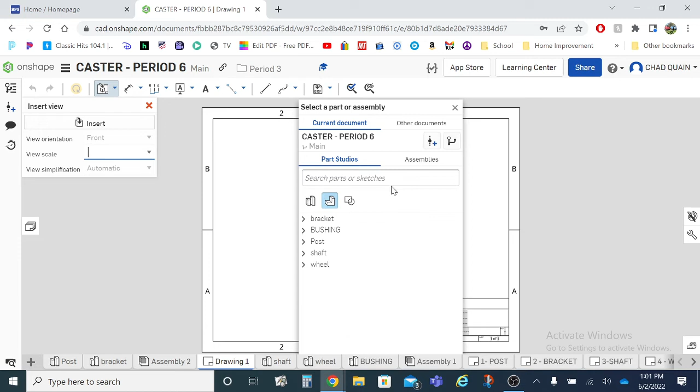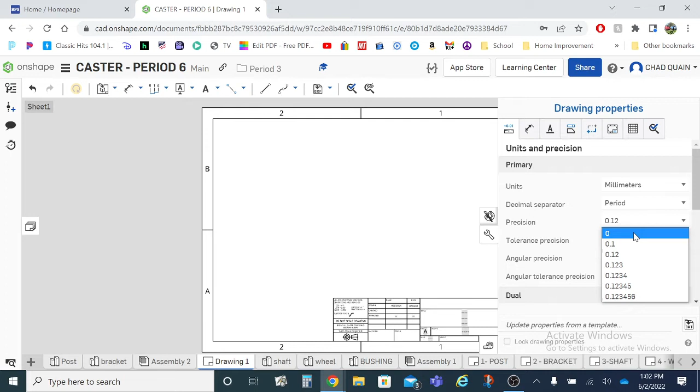So it's going to ask me, what part do you want to insert? I don't care about that right now. I don't even care that this part's open here. What I care about is this little wrench. I'm going to click on the wrench. I'm going to change my units to millimeters. I'm going to change my precision if I need to. I think most of my dimensions are with no decimal place, so I'm going to put it at 0. I'm going to click the wrench again. It's going to close it down.

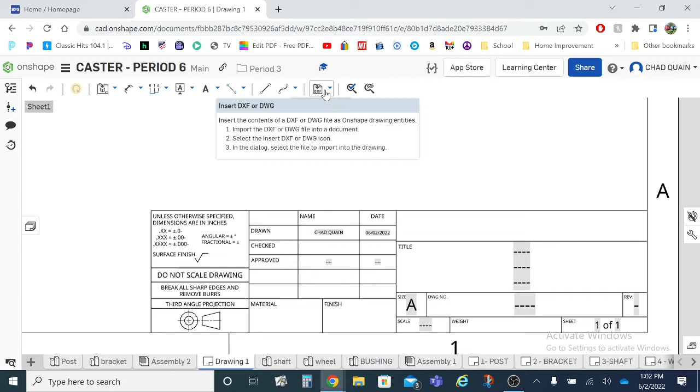What I want to do is show you how to go about modifying your title block so that everything looks correct. One of the things you have to do in this drawing is add in your HutchTech image. So I'm going to click on Insert Image. Your HutchTech image should show up immediately. If it doesn't, it means that you never imported it into the actual drawing. I can show you how to do that if you need it.

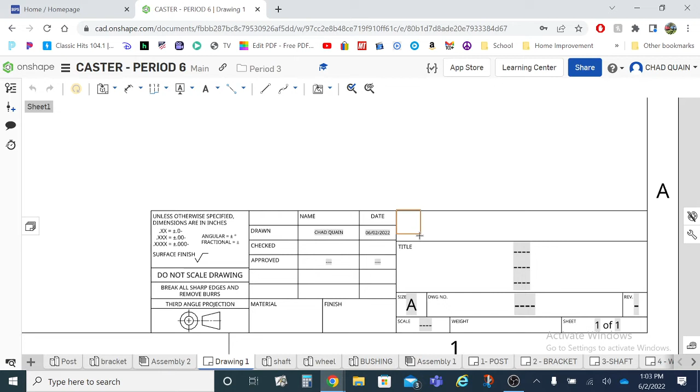So the next thing it's going to do is ask you to pick a place to place it. I'm just going to simply arbitrarily pick somewhere. There's my part. Hey, guess what? It's a little too big, so I can grab on the corner of it. Now it's a little too small. I can left click hold, and I can kind of adjust it. If you zoom in on it a little bit, you have a little bit better control of it. Just be careful because sometimes the snap points will kind of mess with you a little bit.

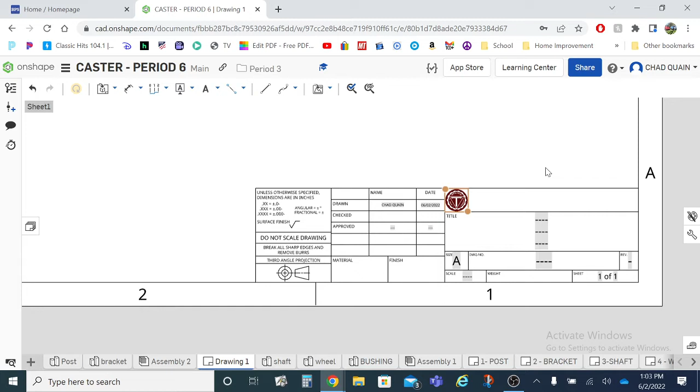That's nice looking. So I'm going to select on the part. I'm going to do a Control C and a Control V. Weirdly enough, Onshape does not have the ability to right click and copy, but it has the ability to right click and paste. Why? I don't know. Weird anomaly. So I'm just going to take and place my other logo right here.

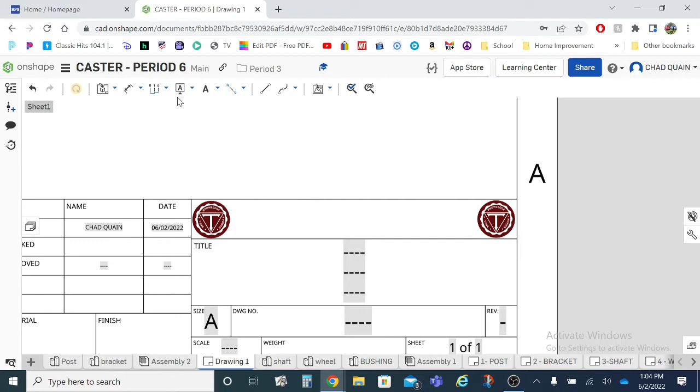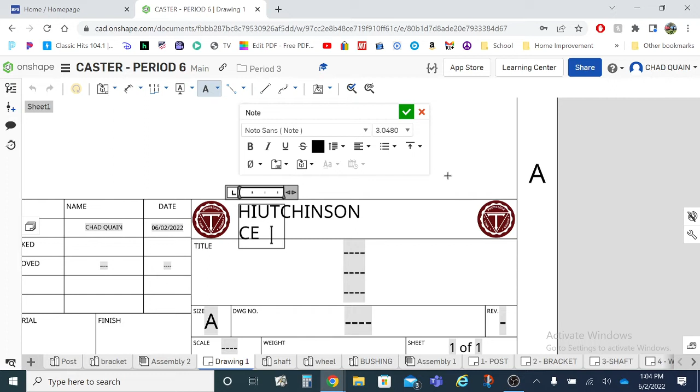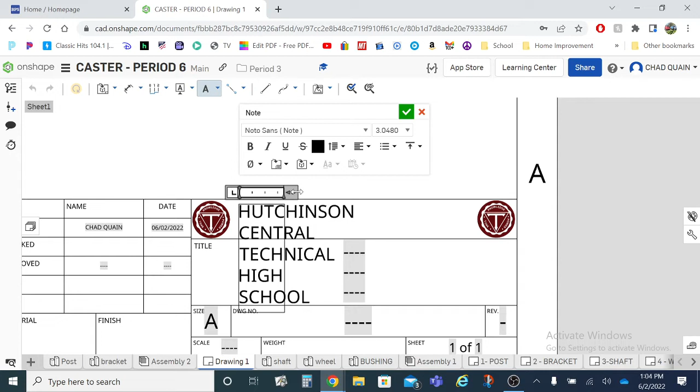Next, I want to put the HutchTech name in here. So I'm going to use the Note command, and I'm just going to simply place the Note command. I'm going to type in, really poorly in all caps, Hutchinson Central Technical High School, spelling Hutchinson correctly. You'll notice right now I've got a big problem here where my text is jamming on 4 or 5 different lines. I have the ability to use this push-pull right here, left-click hold, and now I can adjust my text so that it fits into that space a little bit better.

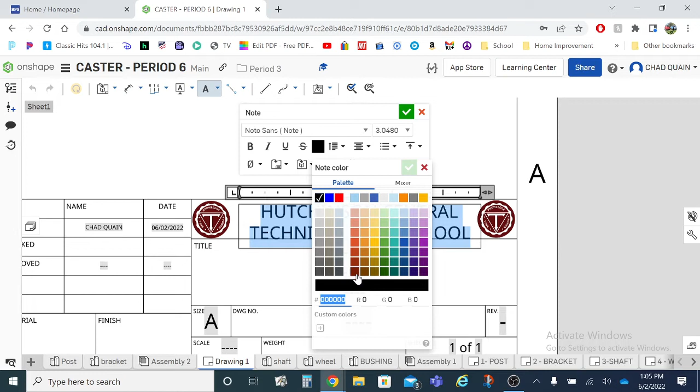Don't forget that you're going to use center alignment. If you want to change the text color, highlight all of your text, find this big black box. The maroon that I used is going to be this all the way down at the bottom. Go ahead and green check mark it. If you want to make it bold, go ahead and make it bold. Green check mark it. If you want to change the text, you can change the text. Just note that sometimes if you change the font, it's not going to fit in there as nicely, and you might have to modify the font characters.

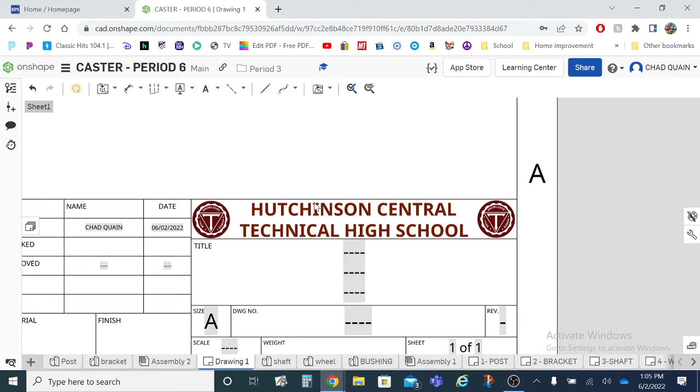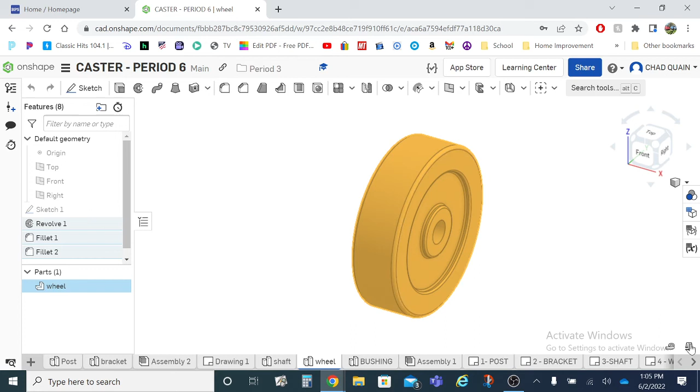A couple things I want you to note in the title block. Number 1, you're going to see a spot for the weight. Each part has a specific weight that has been given to it. So if I come over here and let's say I'm going to do the wheel. I select on this wheel, I click on the weight here. I now have the weight showing up here. Control C to copy it. I'm going to find my drawing, and then I'm going to double click on this weight. I'm going to do a Control V.

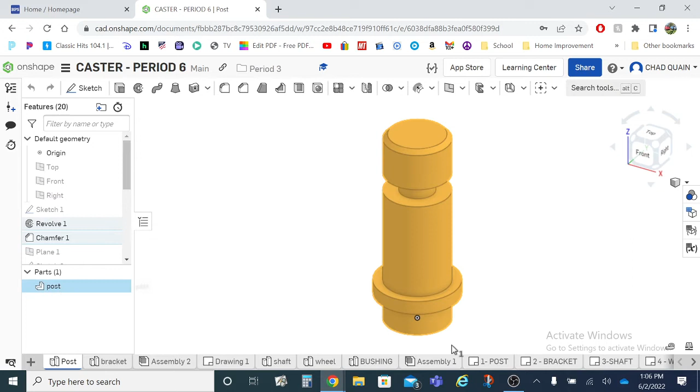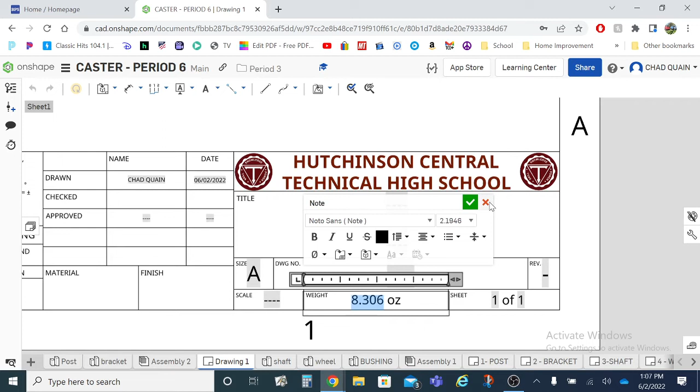This weight is going to be the same weight that you are going to put in your quiz. The only difference on your quiz, you're only using the numbers. No spaces, no ounces, no labels or anything like that. If you use any of those spaces or the ounces when you do your quiz, it's going to mark it wrong. And I only want the rounded up value that Onshape gives you. If you hover over the actual weight, it's going to give you a mass that's a little bit more precise. I don't care what that precise is. Okay. All right. Green check mark it.

You are also going to be filling in your material and your finish. Your scale should automatically update for you. These dashes, remember, pick the one that you want to work with, delete the rest of them. Sheet numbers, make sure it's something of, there should be 6 sheets altogether.

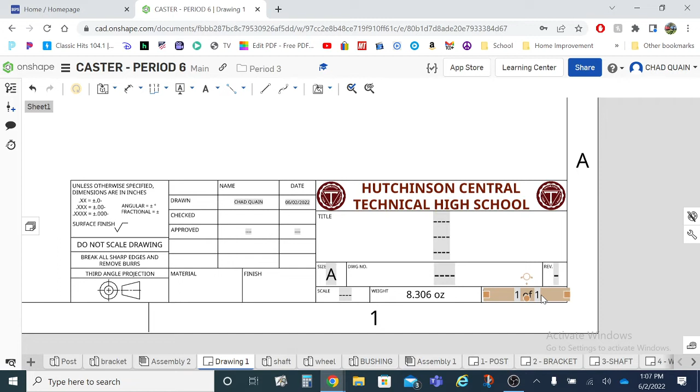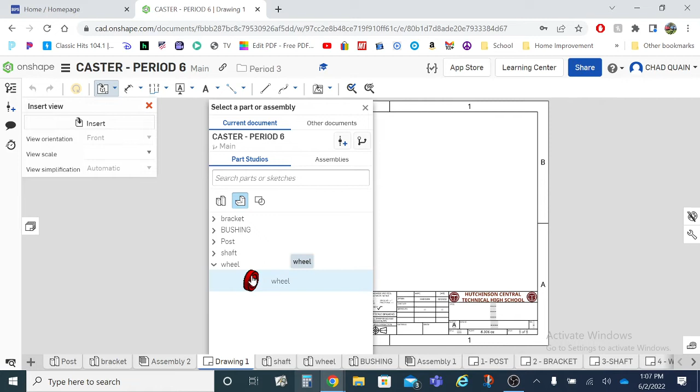Now, let's see here. When it comes to your wheel, I'm going to just do this drawing here for the wheel because it has the most amount of information that I need to cover with you guys. First thing I'm going to do is select on my wheel. I'll let it think about it for a second. It is currently choosing the wrong orientation, so I'm going to change it from front to left. I'm going to change the scale of it so that it is 1:1. I don't really know what the real scale is.

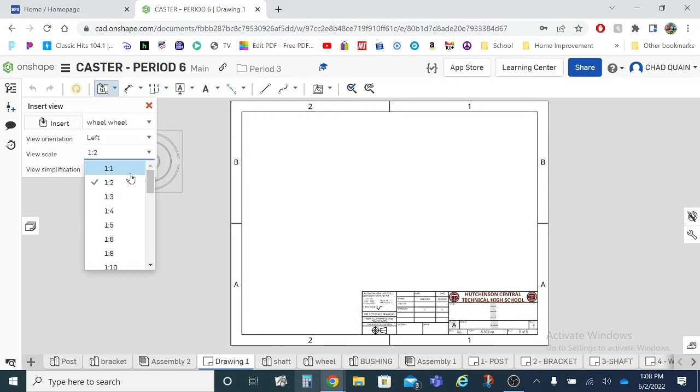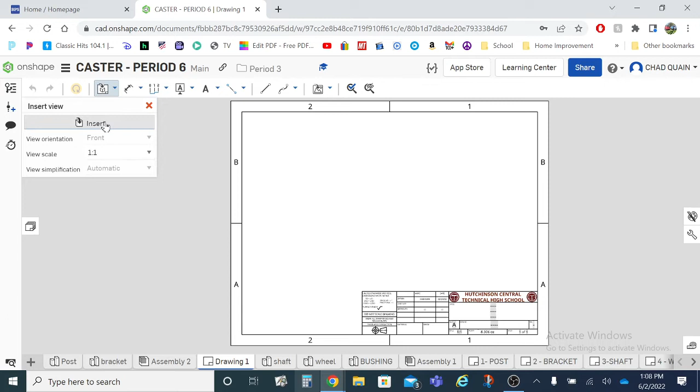There's my first part. And I'm going to hit escape, because I don't want a view over here. All right. Now, let me back up here for a second. Let me do this a little different. Technically, I could have done this a little differently. I could go insert view, again, change it so that I am wheel, change it from that to that. I'm going to place the part just like I did before.

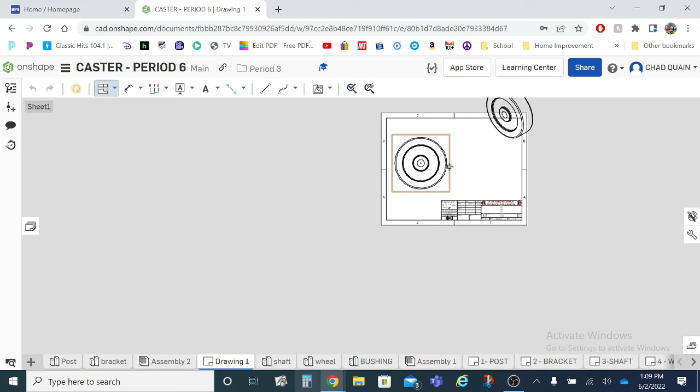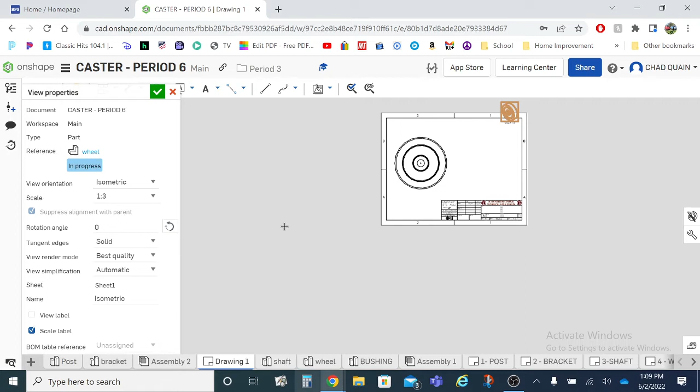And this time, I'd like to get the isometric of it. Now, I'm just going to place the isometric for now and call it done. I need to change the size of it later on. But what I'm going to do is double click on the actual isometric. And I think a lot of our scaled isometrics are about a 1:3 ratio or a 1:4 ratio. Okay. Green check mark it. I'm going to zoom in here. And I'm not going to try to move everything. Let me do that because I kind of messed up the title block.

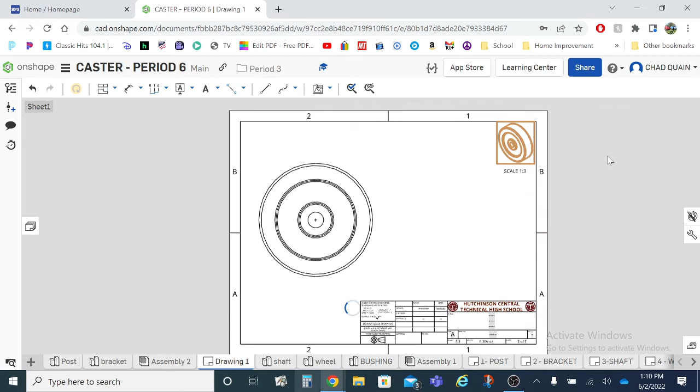So now I've got my little isometric in the corner. One of the things is my isometric was shown in color, correct? This one's black and white still. So what I'm going to do is right click, go show hide, and then change it to show shaded view. Boom.

Now, Jillian, what are you working on?

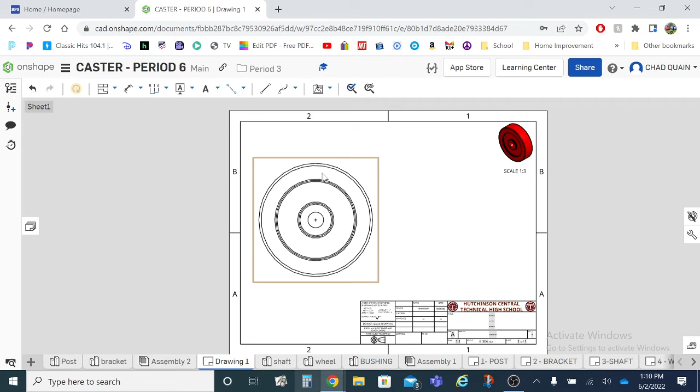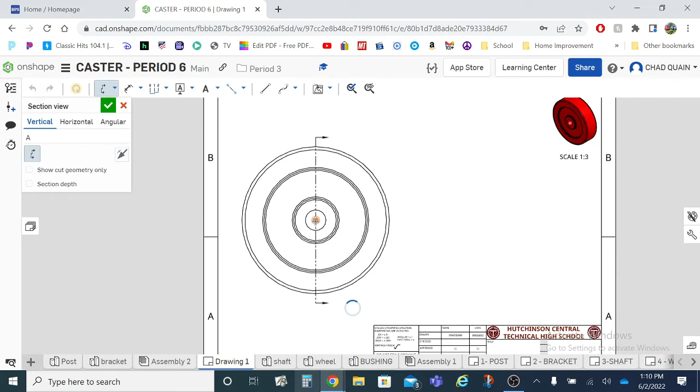Okay. So next thing I want to do is create my section view. In order to create the section view, I'm going to find underneath projected, scroll down, and find something called section view. Sectioning something is nothing more than cutting a chunk out of it, seeing what it's made out of. I'm going to go right dead center and I want to cut the object right in half. I'm going to slide over to my right. And then you will notice that it's going to slice it in half, and it's going to put all these angled lines in there. Those angled lines are called hatch marks.

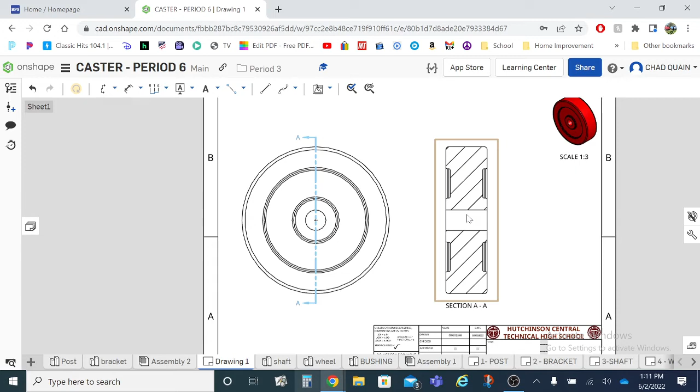And they are nothing more than an indicator of, if you think about it, if you took a saw and you were to cut through a piece of material, each time you cut with that saw, it's going to leave a little scratch or a little mark. So those are technically its saw marks: wherever you see the saw marks, that's where the saw blade was touching the material and cutting it. Any place you don't see that, well, guess what? The saw blade didn't cut it. So you can get a cross section of it nice and easy.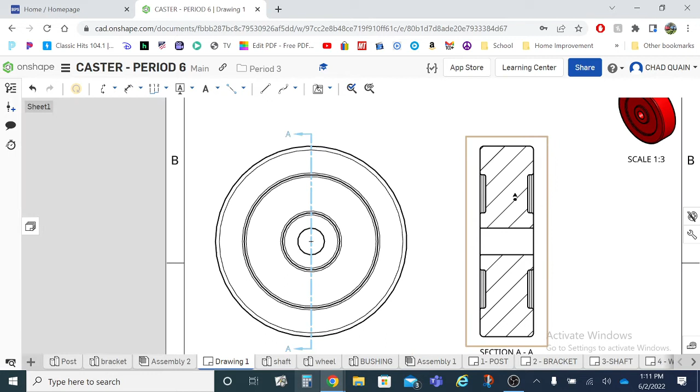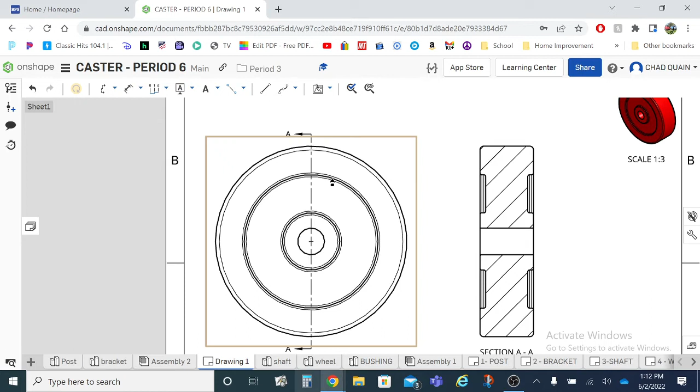One of the things that we want to do with this drawing is make sure that it is a simplified view. It's not complex. Right now, this is complex. It's got a lot of tangent lines to it. And what I mean by that is when I have a circle, especially a fillet, I have a starting point for the fillet and a stopping point for that fillet. In our views, it's shown as those being the start and stop points. I don't want them, so I'm going to turn them to hidden. It's going to clean up my drawing. I'm going to do the same thing over here, turn those to hidden. Cleans my drawing right up.

I also need to add a detail view for this drawing. So I'm going to come over to where my section view was and scroll down to detail view. We've done detail views before. Pick a spot, draw a circle around it. And then if you need to change your scale, change your scale. Okay. So now I got my detail view. Now I can put my dimensions on.

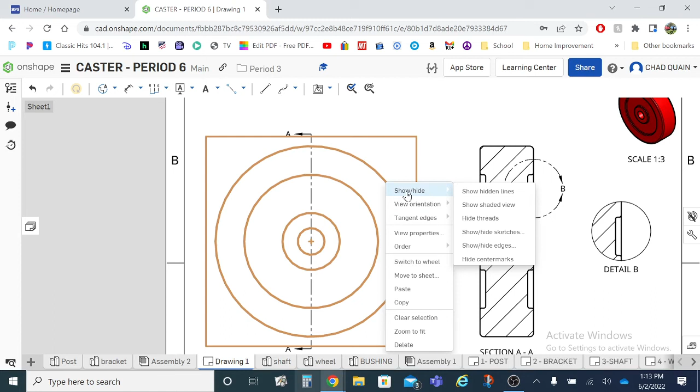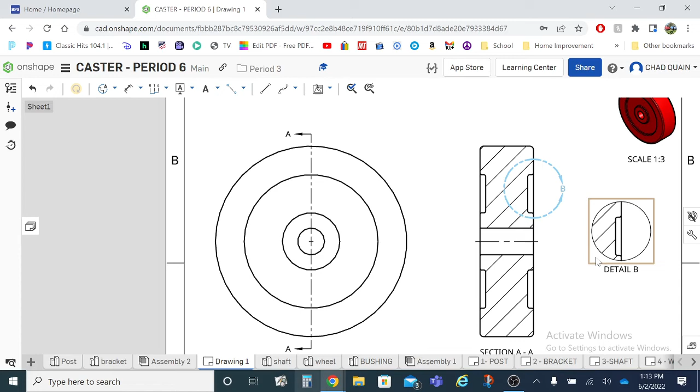Speaking about dimensioning, if I need to draw a center line for anything, I can draw center lines. If I need to show hidden lines, I can right click and go show hidden lines. I can also right click and go show center marks if I need to show those. Okay, same thing here. Show center lines. Okay. Now, let's say I need to indicate what this radius is here. I can come out of my dimension and do a radius. Select on the radius here. Now I can put the radius on. All right. If I need to do something a little bit fancier.

Oh my goodness, stop.

If I need to do diameter dimensions, I can go under my dimensions and do diameter. I can place those wherever they need to be.

If I needed to add notes to any of my diameters or any of my dimensions, there's a note in our instructions explaining that this box right here will put text after my dimension. If I want text to show up underneath my dimension, I can put it here and it'll show up.

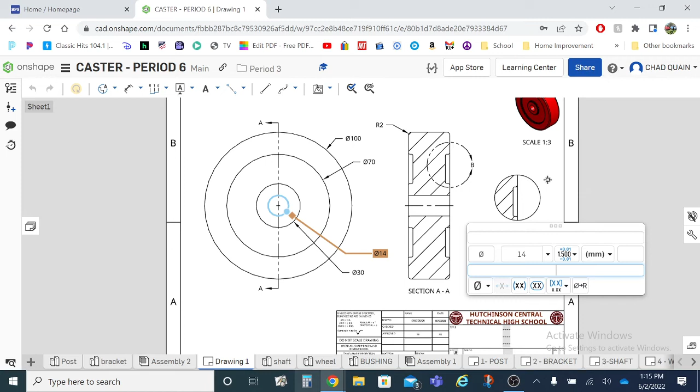Do not, I repeat, do not modify your dimension numbers here. Don't try changing it. The reason is because what will happen is you'll get an underlined value, and I'll know right then that you modified the dimension and it's not correct.

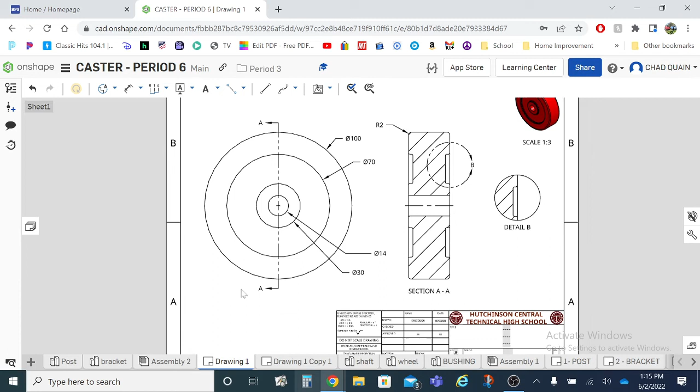One last thing I want to cover is if I need to do a footnote for something. Let me bring up another drawing. I'm going to show you how to copy this working drawing because I've already done all this work to my title block, and I want to keep it for the next one. So I'm going to right click, duplicate. There's my duplicate drawing. It takes a second or two to load.

I don't want any of this information anymore. I can select it, delete it. Let me bring in one of the parts that I need to indicate a chamfer on - my post that needs a chamfer.

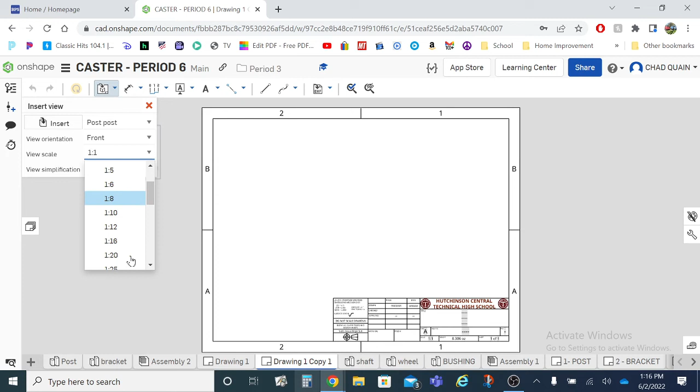I'm going to change the scale so it's something a little bigger. Okay, there's my right side view. Well, that's my other view of it. That's not really what I want. I'm going to go isometric, so I'll just slide up a little bit.

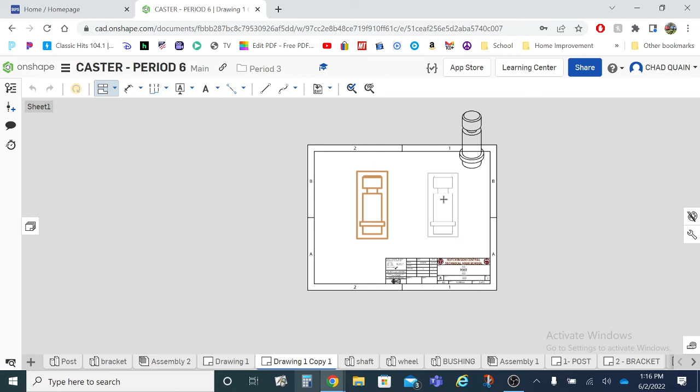I'm going to place it, and then what I want is to have another view here. But what I'm going to do is change this view so that it is, let's just say, the top. Okay, so now you'll notice it changes a couple things here, modifies the way my object looks.

Is there anything wrong with the way it looks? No, it's just a different orientation. But I needed to be able to see the circles.

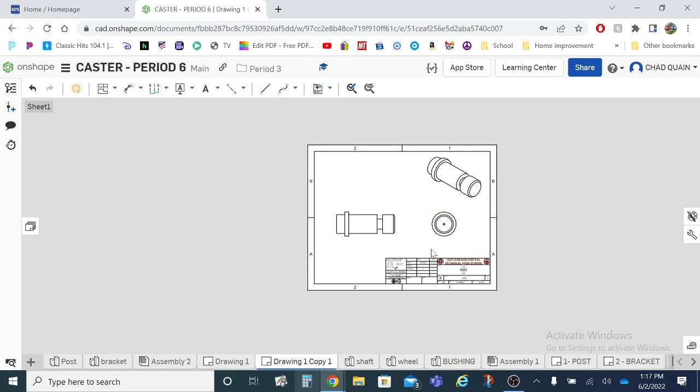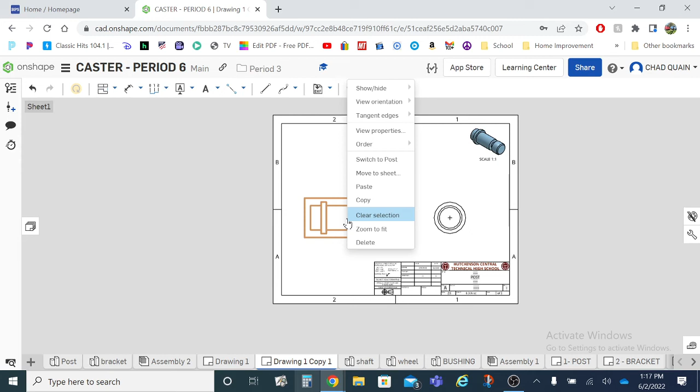So right here again, just as a review, I can double click, I can change the size of my object. Left click hold allows me to move it. Right click, show or hide shaded version. This piece here, I want to show the center lines to it. Okay, I've already got a center line over here. I need to dimension, let's say, a diameter.

Very easy - come over here, again diameter, pick out my diameter. If I need to indicate the chamfer, I can select chamfer dimension, and now I have to pick two references. One is always going to be your chamfer angle, and the other is just going to be a simple line that you want. Obviously, I want my chamfer to indicate the acute version, the smaller than 90 version, rather than the larger than 90, the obtuse.

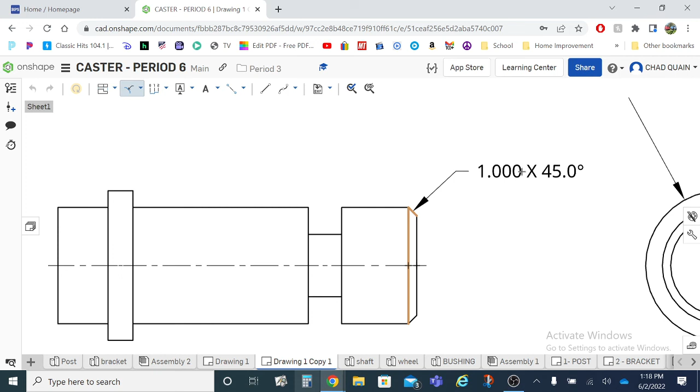So you will see right here, now I have my value. I can double click on it. If I need to change my decimals, just go ahead and change it.

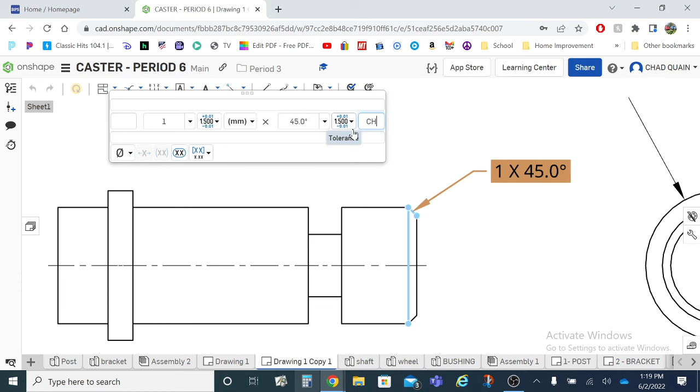So now that we have our value changed, I think there's supposed to be something written on here to say 45, and I think it says chamfer after it.

If you needed to, for some reason, create a little footnote for something, you can click on your note. I can select on my line, then simply move over, left click, and now I can type in whatever I need to type in. Let's say I need to do that chamfer, but a little differently - I can do 1 by 45, and then instead of using the diameter symbol, I select the degree symbol, and then type in chamfer.

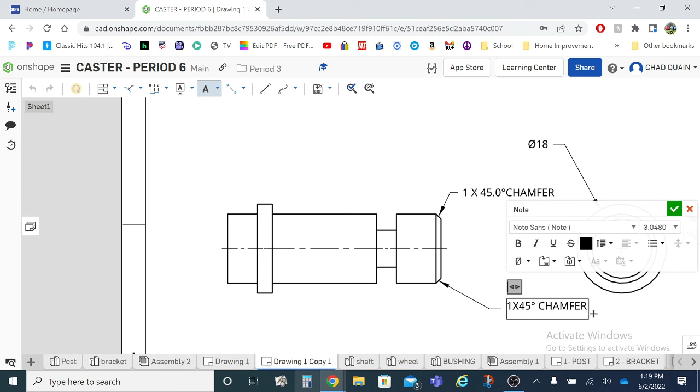Do both of them do the same thing? Yes. Does this one take just a couple seconds longer? Yes. But if I had no idea how to do that, I could easily create it. So just keep those things in mind, okay?

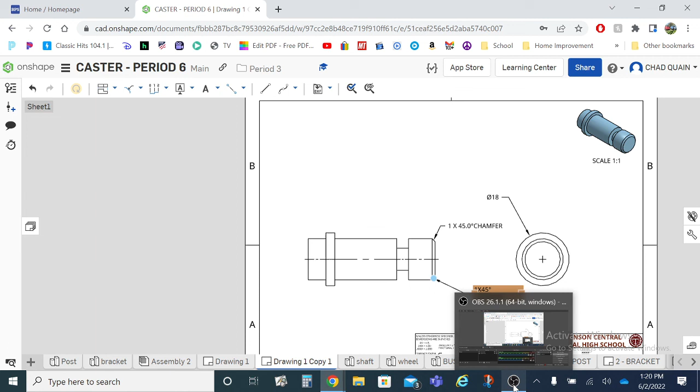Let's see here, is there anything else I can think of? I think that's it. Just remember, always make sure your units are changed, and then click on the wrench again to close that out. Don't forget to make sure your title block is completely filled out. I do not want to see you typing in weight in ounces. No - that's like you typing in last name, first name, instead of what your actual last or first name is.